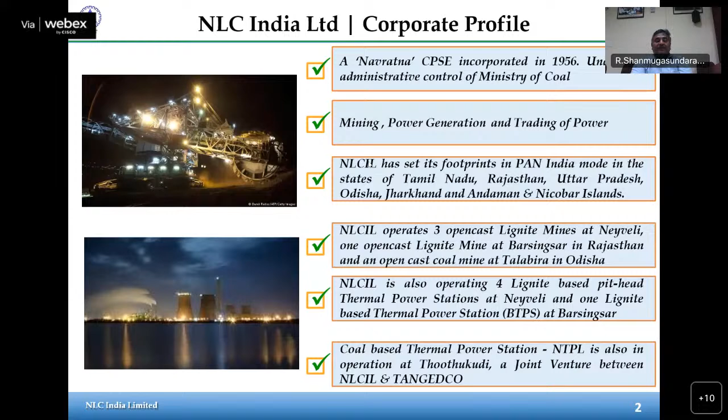NLC is also operating 4 lignite-based pithead power stations at Neyveli and 1 lignite-based power station at Barsingsar, Rajasthan. A coal-based power station at NTPL is also operating at Thoothukudi, a joint venture between NLCIL and Tamil Nadu Generation and Distribution Company. NLC has also forayed into the renewable energy sector.

Presently, the company is operating solar power plants in various districts of Tamil Nadu and the Andaman and Nicobar Islands. NLC is the first CPSE to cross 1 gigawatt capacity of solar power generation. Now the company has become a member of the International Solar Alliance. NLC is aiming to achieve a total renewable energy capacity of 4,531 megawatts.

NLC, in joint venture with Uttar Pradesh Rajya Vidyut Utpadan Nigam Limited, is setting up a 3 x 660 MW coal-based thermal power station at Ghatampur, Uttar Pradesh. NLC is entering into coal mine projects also and has commenced coal production in Talabira, Odisha. So this is our pan-India presence.

At Neyveli, we have lignite mines and power stations, and in Rajasthan we have mines and a thermal power station. At Ghatampur, we are now constructing a coal-based power plant. At Talabira, we have coal mines, and in the Andaman Nicobar Islands we have our renewable solar power plant. In Tirunelveli district, wind and solar energy is there, and across Tamil Nadu we have more renewable energy with wind and solar power generation.

So this is our core business, mining. Currently, we have a mining capacity of 50.6 million tons per annum, out of which 20 million tons is from coal and the rest is from lignite. In power generation, our thermal power station capacity is 3,440 megawatts, and from renewable sources it is 1,370 megawatts of solar energy and 51 megawatts of wind energy.

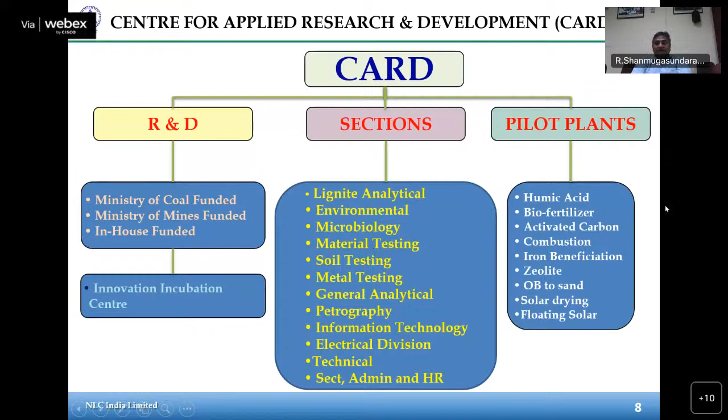We have different sections, and we are an NABL accredited laboratory: lignite analytical, environmental, microbiology, material testing, soil testing, metal testing, general analytical, and petrography. They analyze the regular samples, and we also have pilot plants like humic acid, biofertilizer, activated carbon, etc.

Currently there are around 900 billion tons of coal, and low rank and high-ash coal is more than 50% in the entire world. So we have to depend on coal for our energy.

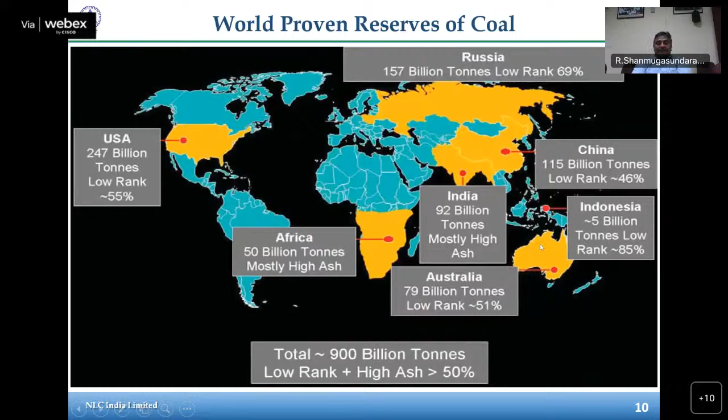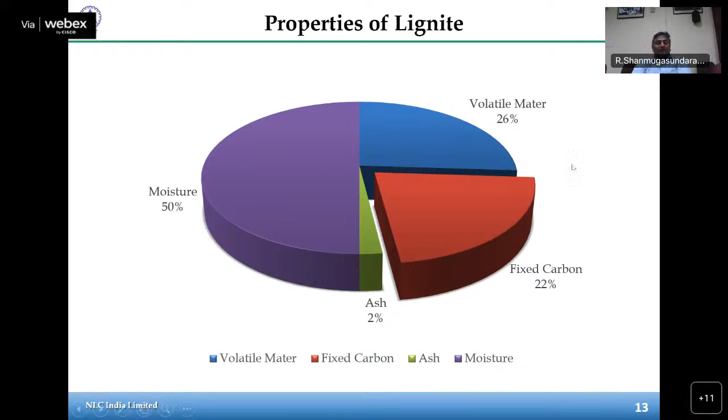So this is our property. As you are aware, our lignite contains more moisture, that is more than 50%; 50 to 56% moisture is there. Volatile matter is 26%, fixed carbon is 22%, and ash is around 2%.

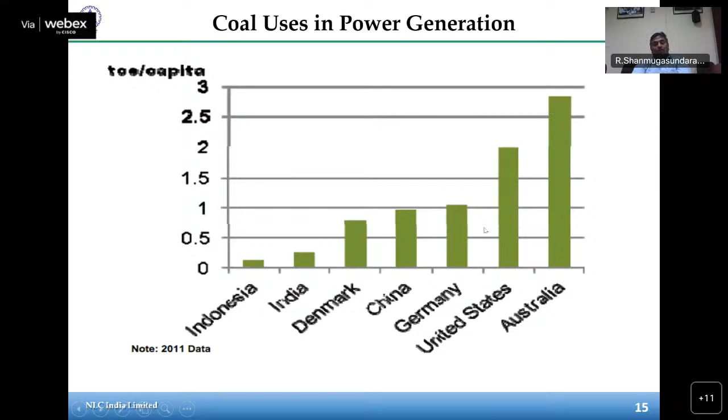So this is the coal use in power generation, in tons of oil equivalent per capita. India is around 0.3 tons of per capita coal use. Compared to developed countries like Australia, it is more than 2.7, and the United States and Germany are all above one ton of oil equivalent.

So, need for reduction. The United Nations Environment Programme estimated that for the world to prevent global warming from reaching more than 1.5 degrees centigrade, the world would need to cut carbon emissions by roughly 7.6% annually for the next decades. To achieve this goal set in the 2015 Paris Climate Agreement, a combination of carbon capture strategies is required in addition to the transition to low carbon energies.

Additionally, the global demand for energy has been forecasted to increase by 50% in 2030, with oil and gas the major feedstock for 90% of chemicals, petrochemical products, and energy. Hence, carbon capture, also known as sequestration, is an effective strategy to scavenge carbon dioxide from the atmosphere, decarbonize industries, and promote clean fossil energy production. It has become an effective approach to mitigate global warming and dangerous climate change. Furthermore, it has become a sustainable energy technology that could be used for long-term storage.

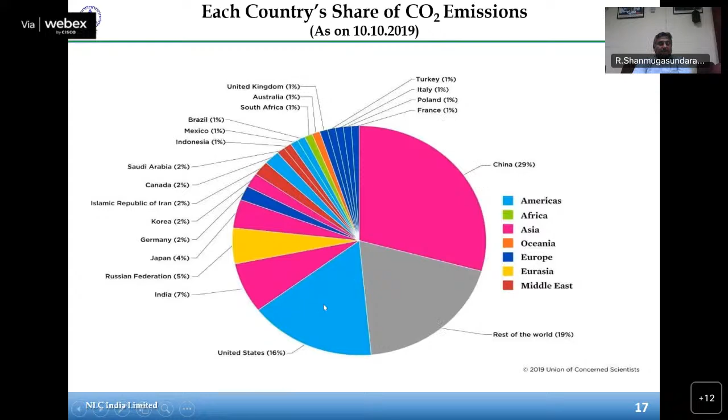This is each country's CO2 emission. You see, China is emitting around 29%, USA is 16%, whereas our India, we are emitting only 7% of the CO2.

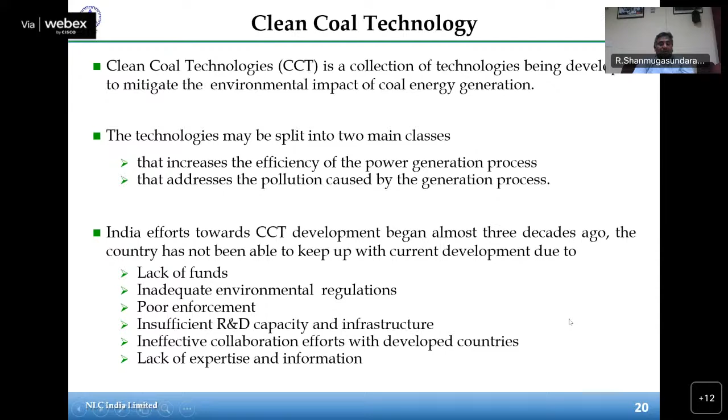In India, efforts towards clean coal technology development began almost 3 decades ago. The country has not been able to keep up with current developments due to lack of funds. We have to put more FGDs, that is flue gas desulfurization, which requires more funds and is an additional burden for thermal power plants, and inadequate environmental regulations. Still we don't have any CO2 emission norms. Also poor enforcement, insufficient R&D capacity and infrastructure, ineffective collaboration with developed countries, and lack of expertise and information.

So clean coal technologies: during mining, through management and practice, we can reduce some extraneous materials in coal preparation. In coal, we can use washing and beneficiation, thereby reducing ash and sulfur contents.

Conversion technologies: currently most of the power plants are operated at subcritical level. We can go for supercritical and pulverized fuel bed combustion and integrated gasification combined cycle. Post-combustion cleaning also we can do, with particulate and gaseous pollutant removal. Burning coal gives rise to a variety of wastes which must be controlled or at least accounted for.

So-called clean coal technologies are a variety of evolving responses to late 20th century environmental concerns, including global warming. However, many of the elements have been applied for many years; coal cleaning by washing has been standard practice in developed countries for some time. It reduces emissions of ash and SO2.

Electrostatic precipitators are used in our thermal power plants, and thereby we collect more than 99% of the fly ash. All the fly ash is used effectively by cement companies and brick making companies. So we are utilizing 100% of the fly ash, and bottom ash is also used for road construction, road laying, and embankments.

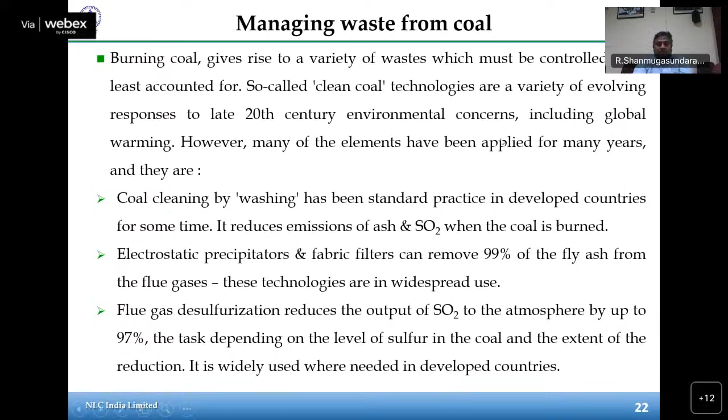So low NOx burners allow coal-fired stations to reduce nitrogen oxide emissions up to 40%. Coupled with reburning techniques, NOx can be reduced by 70%. Increased efficiency of plant, up to 46% thermal efficiency, around 50% expected in future, means that newer plants create less emissions per kilowatt hour than older ones. Advanced technologies such as integrated gasification combined cycle also give more than 50%.

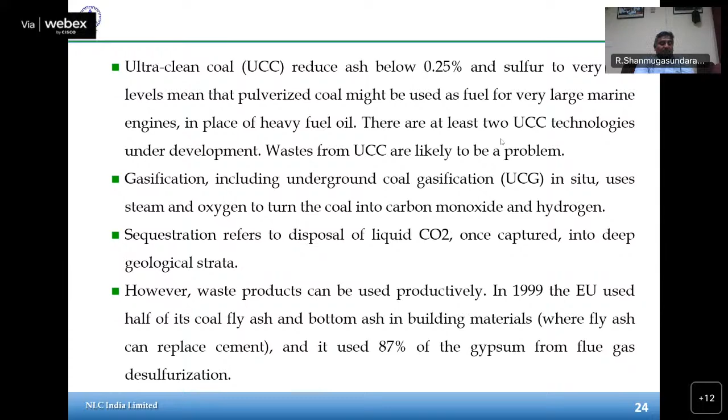Ultra clean coal reduces ash below 0.25% and sulfur to very low levels, meaning that pulverized coal might be used as a fuel for very large marine engines in place of heavy fuel oil. There are at least two UCC technologies under development. Gasification, including underground coal gasification in situ, uses steam. Sequestration refers to disposal of liquid. However, waste products can be used productively. In 1999, the European Union used half of its coal fly ash and bottom ash in building materials.

So, fluidized bed combustion: here limestone and dolomite are added during the combustion process to mitigate SO2 formation. Flue gas desulfurization, also called scrubbers, removes large quantities of sulfur and other impurities. Low NOx burners and integrated coal gasification are already discussed. Selective catalytic reduction achieves NOx reductions of 80 to 90% or more, and it is deployed on approximately 30% of US coal plants. Electrostatic precipitators are always used in our thermal power plants to remove fly ash and other dust particles. Efficiency improvements raise plant efficiency and reduce carbon dioxide and other emissions.

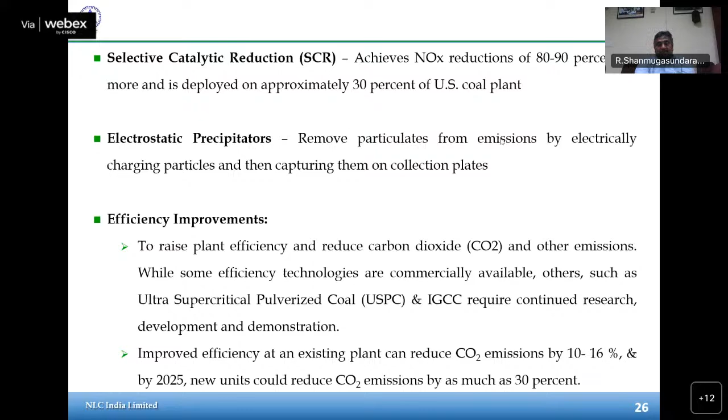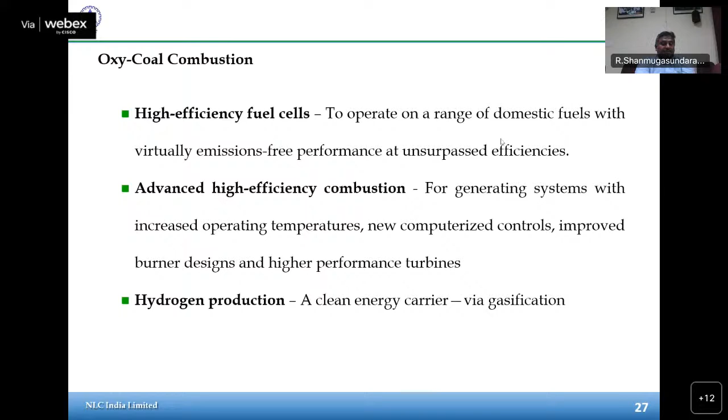While some efficiency technologies are commercially available, others such as ultra supercritical pulverized coal require continued research, development and demonstration. Improved efficiency at existing plants can reduce CO2 emissions by 10 to 16%, and by 2025 new units could reduce CO2 emissions by as much as 30%. Oxy-coal combustion; high-efficiency fuel cells to operate on a range of domestic fuels with virtually emissions-free performance at unsurpassed efficiencies. Advanced high-efficiency combustion for generating systems with increased operating temperatures, new computerized controls, improved burner designs, and higher performance turbines. Hydrogen production, a cleaner energy carrier, via gasification.

So carbon dioxide capture and storage. Here post-combustion capture from flue gas using amine solvent and chilled ammonia can be tried. And pre-combustion capture using IGCC to isolate and capture CO2 before it is released. Oxy-fuel combustion using pure oxygen in the boiler to significantly reduce the dilution of CO2 in the exhaust gas system. These are the carbon sequestration options.

The CO2 produced by power stations can be used in terrestrial sequestration, that means by growing more trees that can absorb CO2, and we can store it in the ocean, and also enhanced oil recovery. So we can inject that CO2 into depleted oil wells so that we can improve the recovery of oil also.

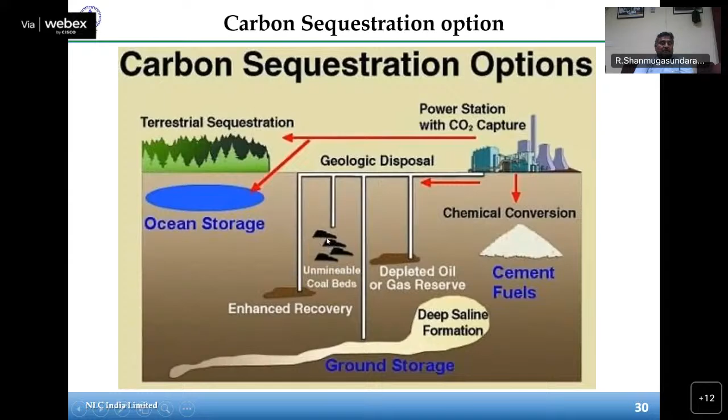So flue gas separation and oxy-fuel combustion. Separation of CO2 from flue gas: CO2 can be separated from the flue gas mixture through solvent absorption, physical adsorption, membrane separation, and cryogenic distillation. In the current scenario, CO2 is captured from flue gas through liquid absorption with solvents such as Selexol, Rectisol, and monoethanolamine.

So we are planning to have this CO2 sequestration at our Barsingsar power plant at one unit with BHEL. They have given some proposal, so we are working on it. So we are going to capture at the 125 megawatt plant at Barsingsar, Rajasthan, combined with hydrogen also, from that CO2 and hydrogen.

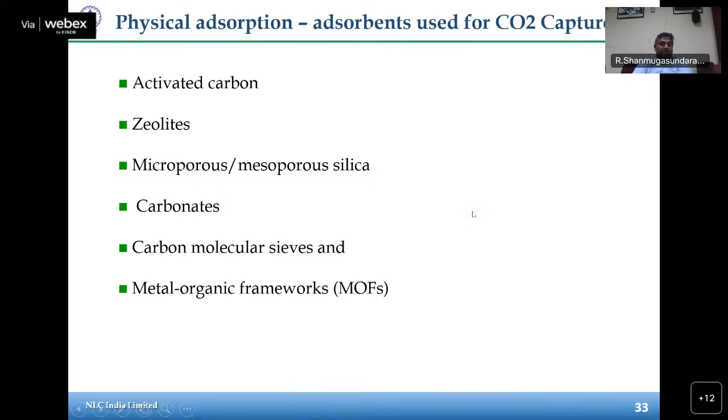So these are the physical adsorption materials used for CO2 capture: activated carbon, zeolites, microporous and mesoporous silica, carbonates, carbon molecular sieves, and metal organic frameworks. Algae also can be used, green and blue-green algae. They need carbon dioxide for photosynthesis, so that will produce more biomass, and from that we can produce bio oil and other things. These are the algal captures.

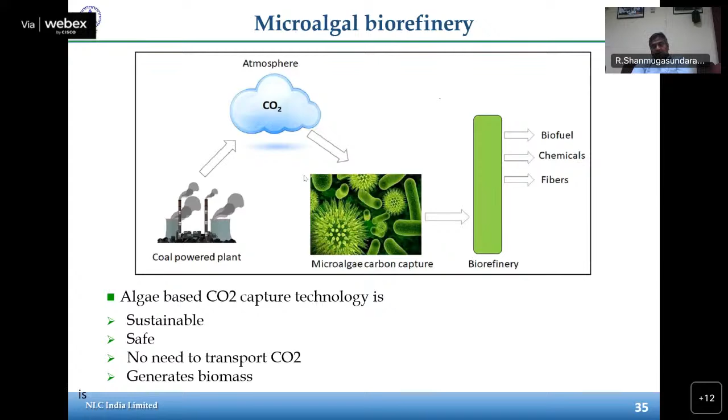This is sustainable, safe, and there is no need to transport CO2. It generates biomass, so we can produce biofuel, chemicals, and fibers. So this is microalgal sequestration. We have done it at our thermal power plant, Thermal One expansion, with NIT Trichy and Pondicherry University. We trapped the flue gas from a chimney, standardized it, stabilized it with some treatments, and fed that carbon dioxide to the algal photobioreactor. Thereby we get more biomass, and we utilized that for producing biodiesel. That project we have completed.

So this is another project. We have done upgradation of brown coal with Kobe Steel, Japan. Our coal has more than 50% moisture, and their technology removes all moisture, so there is 0% moisture. Normally our lignite has a calorific value of 2200 to 2300, whereas after UBC, that is upgradation of brown coal technology.

We can increase calorific value to more than 5000 kilocalories. This can be very well used in ultra supercritical boilers.

With funding from METI, the Ministry of Economy, Trade and Industry of Japan, and also Kobe Steel Japan, we have done this project during 2012. We have provided lignite to their plant in Indonesia. They prepared and we studied the product, but techno-economically it is not very viable.

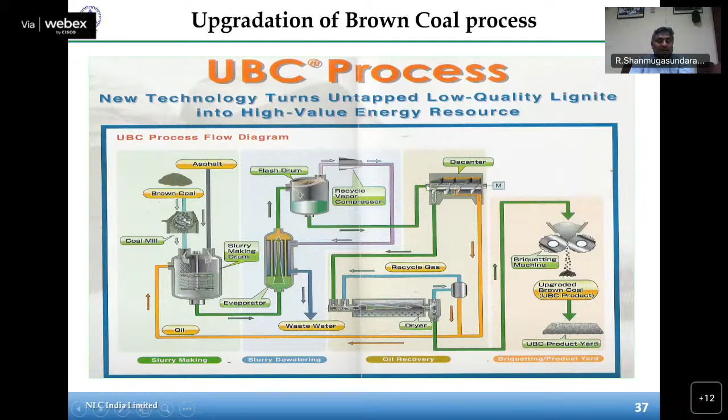This is upgradation of brown coal. Here lignite is mixed with asphalt and kerosene oil. After this evaporator, the oil is separated, and during the separation, wastewater also comes out. During the flash drum process, we can get dried lignite, which can be used in ultra supercritical boilers.

At present, India's lignite deposits within 150-meter depth at a ratio of 1 to 15 are being mined. Though the total geological reserves of lignite in the country are estimated at 44,000 million tons, the reserves within 150 meter depth amenable to open cast mining are only 8,800 million tons, which is only 20% of the reserve. The balance 80% of the reserves are available at greater than 150-meter depth.

There are problems of mining such as slope failure due to unconsolidated nature of overburden, presence of aquifers requiring large quantity of groundwater pumping, high stripping ratio, environmental problems, huge quantity of overburden handling, mine closure, and post-mine closure management.

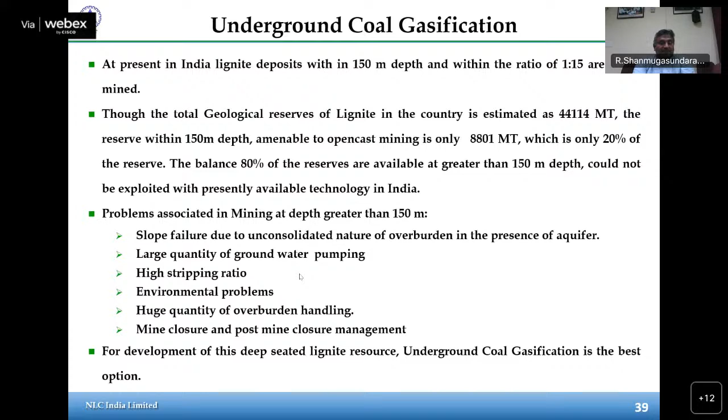For development of this deep-seated lignite resource, underground coal gasification is the best option. This involves underground in-situ conversion of unworkable, deep-seated, thin seam, steep dipping coal or lignite into combustible production gas.

Underground coal gasification operation is initiated by drilling two adjacent boreholes into the coal seam and injecting pressurized agents like hot air, oxygen, or steam into the coal seam, igniting the coal seam and recovering the combustion gases through the adjacent borehole. The connectivity between the injection and producer wells is made by special linking techniques. This is the UCG process.

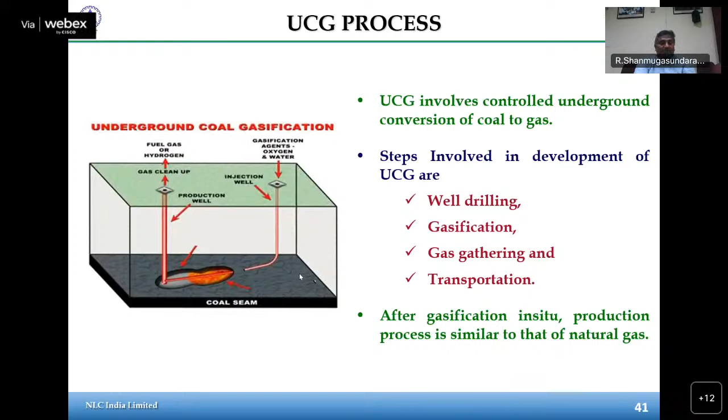The process involves first well drilling, then gasification, gas gathering, and transportation. Two boreholes are used: the coal is ignited and combustion maintained by injecting air or oxygen and steam, and the resulting gases are brought to the surface by the secondary borehole.

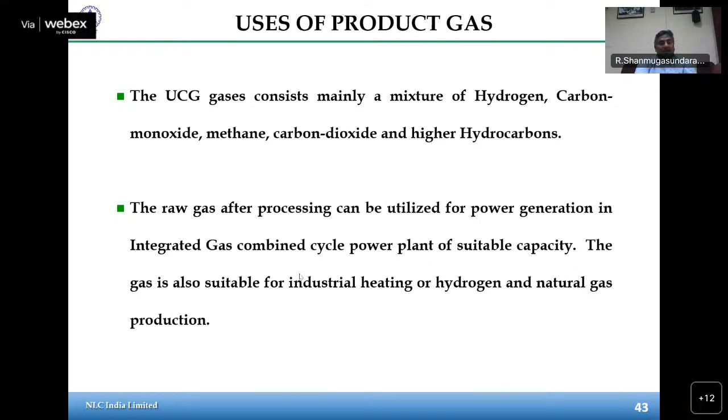As for uses of the product, UCG gases consist mainly of a mixture of hydrogen, carbon monoxide, methane, carbon dioxide, and higher hydrocarbons. The gas after processing can be utilized for power generation in an integrated gas combined power plant of suitable capacity. Advantages of underground coal gasification include less dust, noise, and visual impact, lower water consumption, and low risk of water contamination.

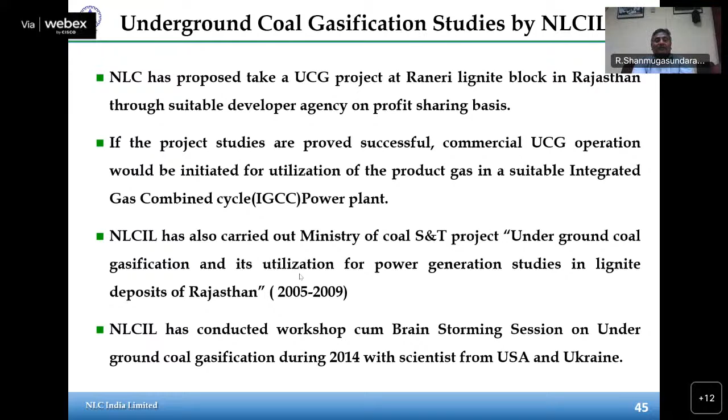This gas is then cleaned by a gas cleanup process. After cleaning, the coal gas is used in the combustion turbine to produce electricity. Combined cycle means this design consists of a combination of turbine and generator, a heat recovery steam generator, and a steam turbine generator. The exhaust heat from the combustion turbine is recovered in the heat recovery steam generator to produce steam, which then passes through the steam turbine to power another generator, producing more electricity.

This is why we use integrated gasification combined cycle. It needs no explanation that gas-based power plants are more efficient than pulverized coal. Implementation of this project will reduce the use of scarce and expensive coke in metallurgy and other industries. Mixing of higher grade coal is totally eliminated, so only local coal and high ash coal can be used, significantly improving the environment by reducing harmful dust and gas, and creating high performance.

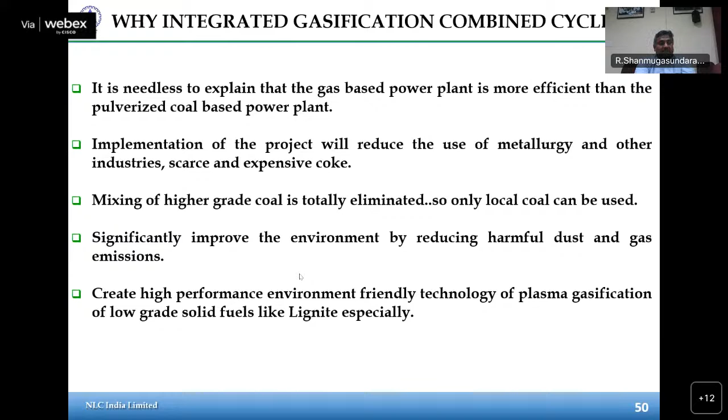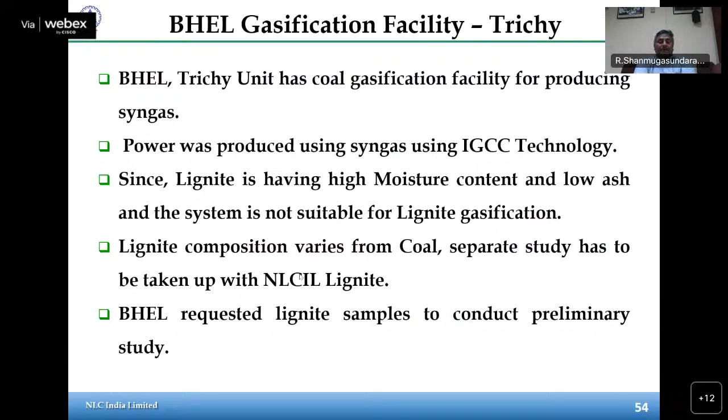On gasification technology, we are currently working with BHEL to produce this, and we have visited the Trichy and Hyderabad units. We gave our samples, and they tested and provided the syngas composition. Based on this, we have signed an MOU with BHEL to conduct a feasibility study for setting up a pilot plant for lignite-to-syngas conversion, integrated with clean coal power generation by IGCC. We are also working on lignite-to-methanol and lignite-to-diesel for clean coal energy, and that tendering is underway, sir.

Fossil fuel based power plants are the major source of carbon dioxide emissions, which leads to global warming. The physical and chemical methods followed to mitigate CO2 emissions are not economically viable, so conversion of captured CO2 into a valuable product is the need of the hour. More research is warranted in this direction to mitigate global warming. Sustainable power development calls for adoption of clean coal technologies to be explored to mitigate global warming.

Thank you very much for the opportunity given, sir.

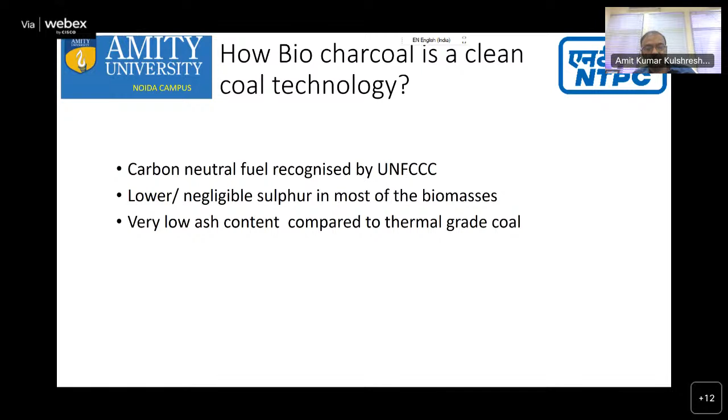So what are the advantages compared to other renewables like solar, wind, and biomass power generation? It has several other advantages, like improving air quality by discouraging open burning of biomass, and utilization of already existing thermal power infrastructure with minor changes.

Creation of solar or wind capacity requires establishment of new plants, but here only the change of fuel is done, and your so-called dirty power resources are converted into clean fuel power plants. So elimination of waste while producing power is another advantage. While you are producing power, you are also clearing the waste.

It also discourages primitive use of biomass for cooking, improving the health of users. When biomass like firewood is used for cooking or heating, it creates a lot of smoke. By providing this alternate market, we discourage this primitive use, and the smoke causing health hazards is eliminated.

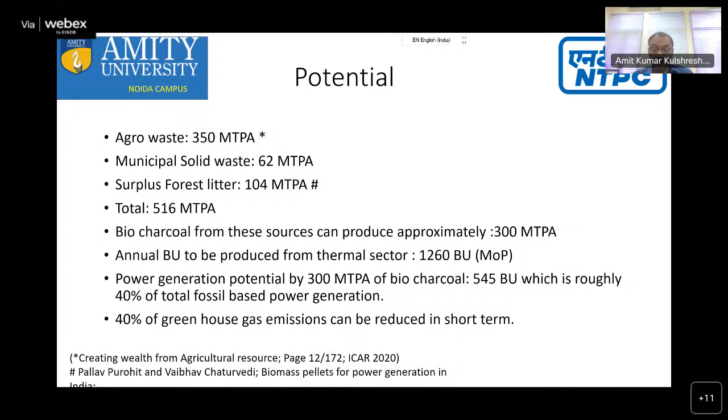So if we go with this kind of torrefaction process. This was about the potential which I wanted to discuss in the beginning, but somehow I skipped that slide. So also, what is the NTPC experience? I have already shared this. We were the pioneer of biomass co-firing, where under my leadership we did the test firing at NTPC Dadri, and then we started the procurement process for the rest of our plants and fired about 70,000 tons of biomass.

Right now we are installing a torrefaction plant at Varanasi. The Varanasi plant is a big commercial scale plant where 600 tons per day of biomass, mostly municipal solid waste biomass, will be torrefied, which is the most difficult kind of biomass for torrefaction. The agro waste and the forest waste are easier to torrefy. So we are experimenting with this municipal solid waste in the NTPC Varanasi plant. For that, we installed a pilot plant at NTPC Dadri a few years back. After the successful operation of that, now we are installing a big commercial scale plant at Varanasi.

The first unit is expected within a few days, maybe by 15th of August this year, and we are planning to install a few pelletization plants also, where the torrefaction process will not be used, only simple pelletization of the agro waste will be done in Punjab. So a few plants there also we are in the process to install. Let us see when they see the light of the day.

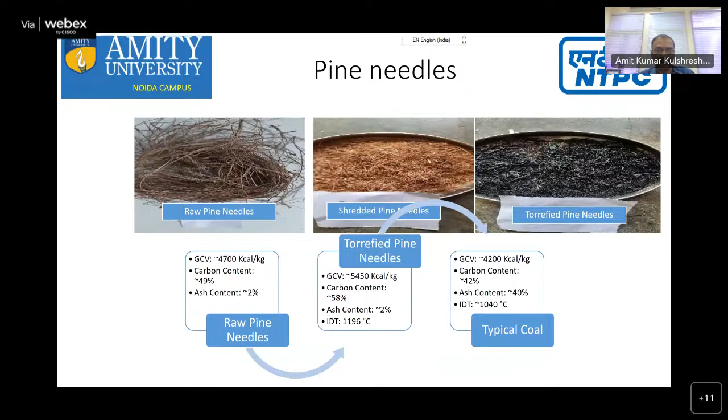So in conclusion, we can say that biocharcoal is a promising clean coal technology and has potential to fully or partially replace mineral coal in most applications. In addition to being a renewable fuel, it has several other advantages like low waste generation, lower emissions, improvement of air quality, and creating more rural wealth.

NTPC has shown the way, and now it is the time to scale up biocharcoal utilization. I would request CIMFR and other CSIR institutes to research in this direction so that biocharcoal utilization is possible at commercial scale. Amity University Noida is also conducting world-class research in this area. The institutes can collaborate among themselves in this research and contribute to scaling up biocharcoal utilization for energy recovery.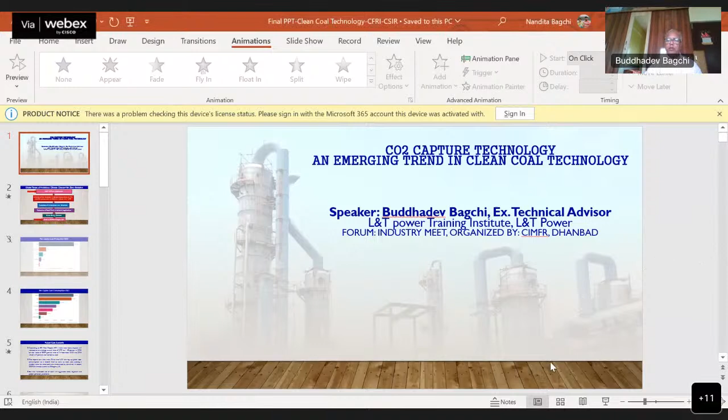Now we are going to my presentation. I am really thankful to the CIMFR authorities, especially the principal scientist, and also Dr. Mukherjee for inviting me and giving this opportunity to speak about clean coal technology. My first speaker almost covered, I will say, 60% of my subject, the CO2 capture technology. So I will add something on the topics.

Now this is the picture of global climate change and net zero emissions. At the Conference of Parties, the Paris Conference, the main agreement was limiting the increase of global temperature to 2 degrees centigrade, with our effort being 1.5 degrees centigrade. To achieve this target, our first action will be reduction of greenhouse gas emissions, and to reduce this, the next target should be reduction of fossil fuel, including coal, in industrial applications.

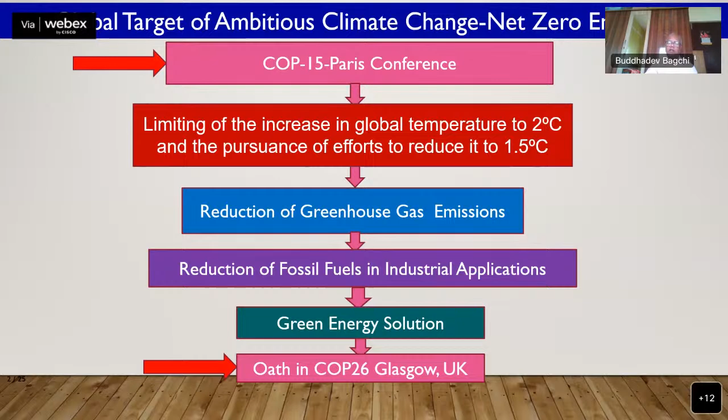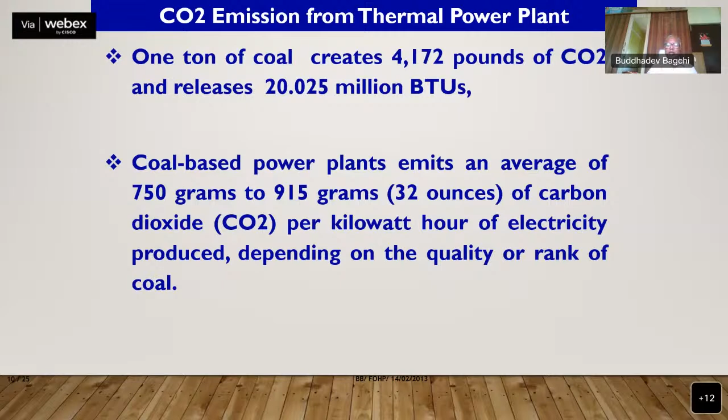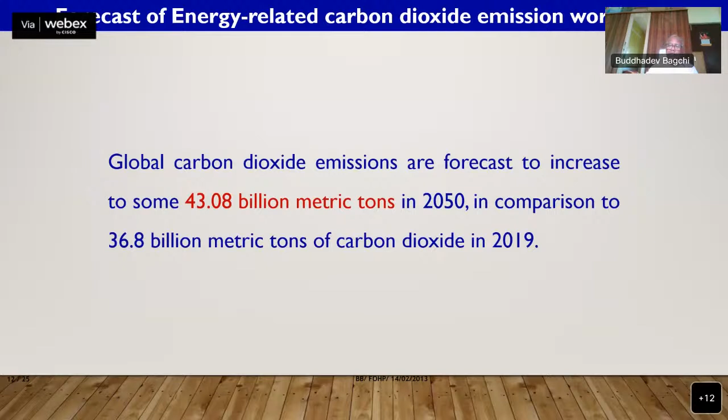So in this respect, the only solution is CO2 capture, utilization and storage technology, CCUS. It is an emerging trend and innovation of clean coal technology. Now, CO2 capture, utilization and storage technology is already running in different countries, somewhere commercially, somewhere as pilot projects. Okay.

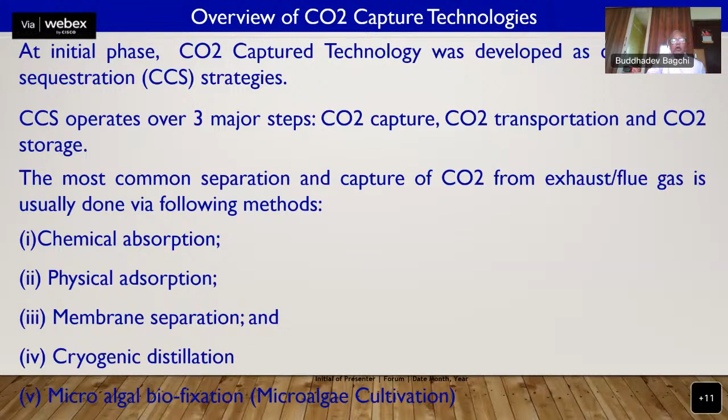The most common CO2 capture technologies usually use the following methods: chemical absorption, as already told, physical adsorption, membrane separation, cryogenic distillation, and also microalgae biofixation. These are the 5 common CO2 capture technologies being used globally at present.

Now, apart from this, there is various R&D work on CO2 capture technology. The advanced R&D work: monoethanol amine, MEA, an alternative absorbent to conventional amine. With conventional amine we generally use alkanol amine, but here we are using monoethanol amine to increase the CO2 absorption capacity. Then another is the combination of DMCA and DPA. It also increases the absorption capacity of CO2.

Next, the hydrate method: formation and dissociation of hydrate. The latest research work. Another research work has also been done using an aqueous solution of potassium carbonate as an absorbent. Next, R&D work has also been done on the calcium looping process using calcium oxide as a solvent for capturing CO2 from flue gas.

And another that has been implemented as a pilot project is the Alstom chilled ammonia process. In the ammonia process, ammonia will be changed into ammonium carbonate or ammonium bicarbonate. And here the energy required for this process will be lesser, and absorption capacity will be very high, about 90% CO2 absorption. Another research was the aqueous solution of potassium hydroxide. So this is the R&D already done on CO2 capture technology.

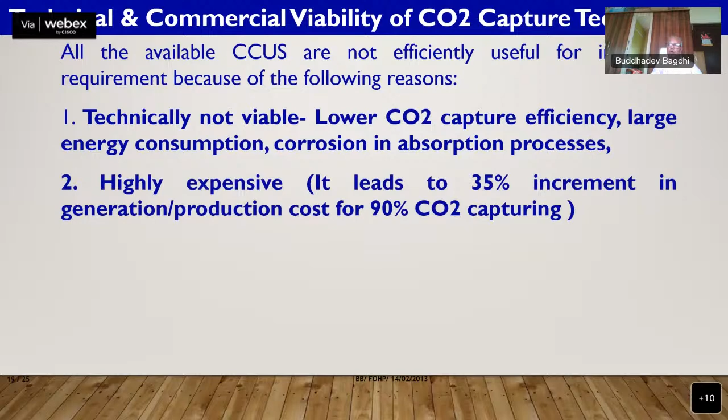But the available CCUS are not efficiently useful for industrial requirements because of the following reasons. Commercial and pilot projects are running, but they have some drawbacks. Technically not viable: lower CO2 capture efficiency, large energy consumption, corrosion in the absorption process. That is the first, technical disadvantage. Highly expensive: for example, it leads to a 35% increment in generation or production cost for 90% CO2 capture. Can you imagine how much it will affect the commercial area? It is not viable at all.

The second part after CO2 capture: it is transported and stored in a geological store or the ocean. It needs a huge pipeline, and storage is not an easy task. It is commercially very costly and technically not so viable. And third is leakage. There may be a chance of leakage from the CO2 storage, which may create further environmental pollution.

And one is microalgae cultivation. It is definitely a very efficient way of CO2 capture, but it is highly expensive, especially the microalgae cultivation process. But the capture is very efficient. So these are the disadvantages of commercially available or pilot CO2 capture technology projects.

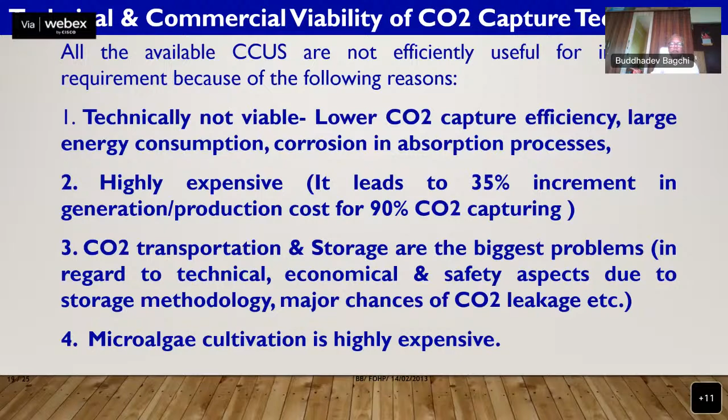Now, ongoing R&D work is going on in some areas to make the technology more efficient and commercially and economically viable. These are the projects underway. A nanoporous material called metal organic framework, MOF. It is spongy, porous, with a high internal surface area, and its CO2 capture capacity is very high. Cornell University has invented a material, nanosponges, very micro sponge materials, that could also improve carbon capture economics.

The third material is a combination of MOF and a polymer. It captures about 90% of CO2 from power plant flue gas. And another is a copper silicate crystal from the Korean Sogang University, named SGU, that can also capture CO2 much more efficiently. Research is still going on.

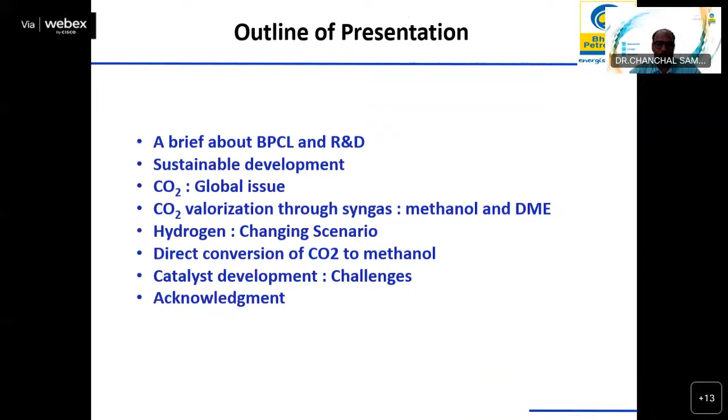Before going into detailed presentation, let me allow to speak about our company, who we are, and what we do.

BPCL is the second largest state-owned company. We are the third largest refiner in India, having 14% Indian refining capacity. It's also the seventh largest company by turnover. We own 3 refineries, more than 19,000 retail outlets, 54 LPG bottling plants. We operate across the length and breadth of the country, and we deliver LPG even in the remote parts of the country, and we are really proud of that. Energizing lives is our motto, and we promise to deliver pure for sure in every activity.

BPCL R&D Center is located in Greater Noida, near Delhi. It is in Uttar Pradesh, and it was established in 2001. We have a vibrant team of scientists and engineers from reputed national and international institutes. And we also do a lot of collaboration with various national and international institutes to accelerate our R&D program.

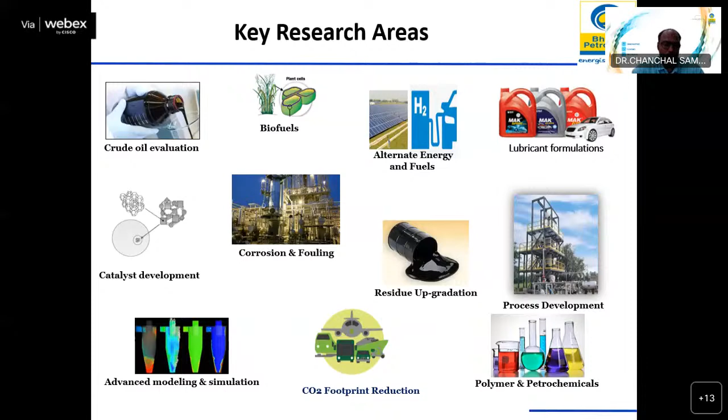So we are all talking about sustainable development, and it is the only way forward because we have emitted enough CO2. And the global CO2 concentration has reached an unprecedented level above 400 ppm. So unless we look for circular economy, we will not be able to sustain in the longer term.

Since the conference is all about clean coal technology, and BPCL R&D also has done a lot of research on clean coal technology, especially coal gasification and coal syngas valorization to liquid fuels through the FT route, we bank on our experience and have further extended our research activities through both in-house research and through collaboration for converting syngas to other valuable chemicals, methanol, dimethyl ether.

We need to remember that India is still highly dependent on coal. Although the government has taken a giant step to decarbonize our power sector and set an ambitious goal of 500 gigawatts of renewable electricity by 2030, our dependency on coal will last for quite some time because we have experienced during this summer that even the redundant coal power plants, the government is telling to generate power. Unless the renewable power generation is backed by power backup facilities, coal is going to last for quite some time.

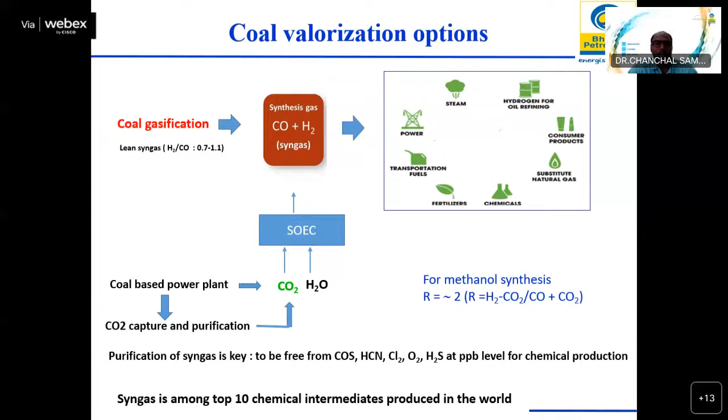So if we look into the research trend on CO2 valorization, the majority of research focus is in the area of CO2, methanol, and CO.

Major global companies in the world are also looking for 7 different kinds of CO2 utilization options, like methanation of CO2 for production of synthetic natural gas, reverse water gas shift reaction for converting CO2 to syngas, and dry reforming of methane. This is also one of the important areas the world is looking at to tackle both CO2 and methane emissions. And then after getting syngas, conversion to methanol, and then methanol to light olefins like ethylene, propylene, CO2 to fuels through methanol via the MTG process (methanol to gasoline), and other cyclic carbonates.

If you look into the various CO2 valorization options, as per International Energy Agency, fuel is going to have medium-term impact in terms of climate benefit, but it is going to reduce significant amount of CO2 emission into the atmosphere because fuels are used in huge quantity.

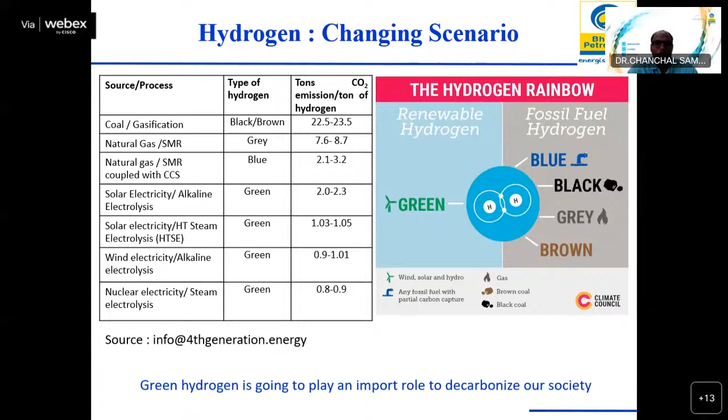If you look into the methanol scenario, just like crude oil, this is also an important commodity which India is highly dependent on import. More than 5,000 crores worth of foreign currency we spend on importing methanol, and this number is gradually increasing.

Niti Aayog is also pushing the M15 program, just like the successful E20 program, for methanol blending in gasoline. So this number will significantly increase, and unless we produce methanol domestically, we have to import huge amounts of methanol from other countries.

That's why CO2 utilization to methanol is a very important step, I feel. Indian government, Niti Aayog particularly, is pushing this project, and Coal India is also taking this project very seriously.

Methanol production process has inherent challenges. This is an exothermic, equilibrium-limited reaction, so the per-pass conversion for syngas to methanol is limited to 15 to 20%.

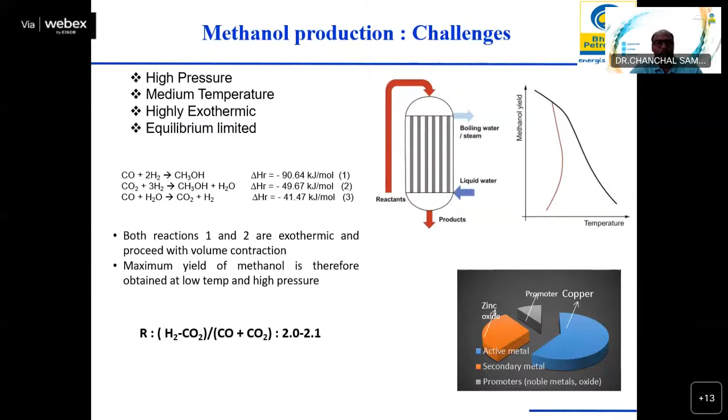So coal gasification also needs to be coupled with a water gas shift reactor to enrich hydrogen, so that we can get the stoichiometric amount of hydrogen by CO ratio of 2.

Methanol synthesis directly from CO2 is much more challenging than syngas to methanol. If we look at the methanol yield with respect to the feedstock CO and CO2, we can clearly find that CO2-based feedstock, or CO2-only methanol production, has much lower conversion and yield compared to syngas.

This technology is also not readily available. The big licensors are Johnson Matthey, Haldor Topsoe, Lurgi, and commercial plants are actually really big in size, 5,000 to 7,000 tons per day capacity, while Indian producers have a maximum capacity of 500 to 700 tons per day. That's why Indian methanol producers are not competitive enough compared to their global peers, and we are importing more than 85 to 90% of methanol.

You can see that we have also — Sir, if you could kindly try to converge and conclude because of passage of time.

BPCL R&D is also working on CO2 to methanol through various internal and external collaborations. FIPI sponsored the CO2 to methanol development project way back in 2014, and BPCL along with IIP Dehradun has done a lot of fundamental research in this area. You can see we have published a number of papers in reputed journals.

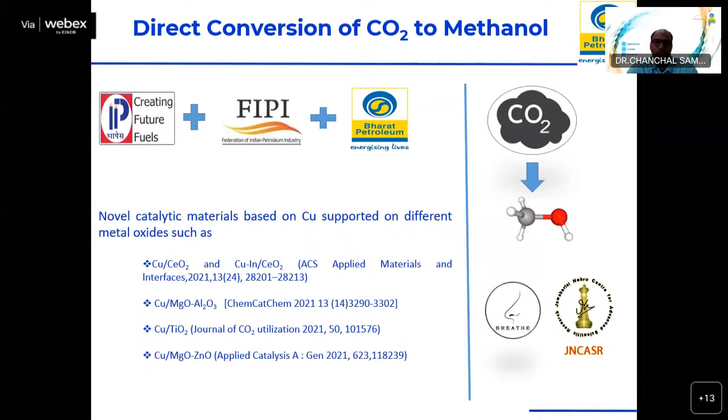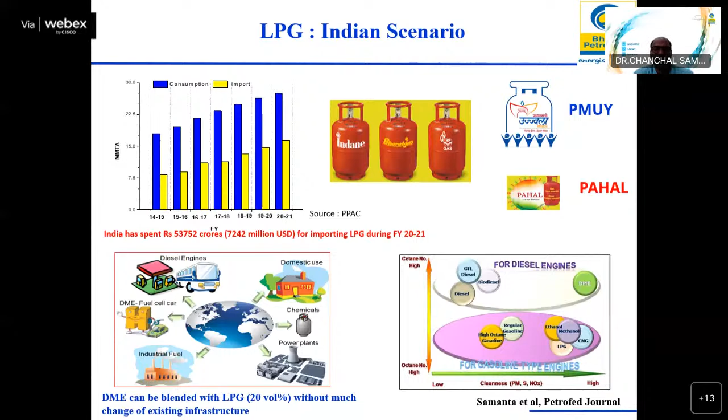Similarly, like methanol, LPG is also being imported in India — more than 50,000 crores India spends on importing LPG. If we can convert CO2 to methanol and then methanol to DME, or CO2 to syngas and then converting to DME, it will benefit India immensely.

You can understand that syngas to DME process has inherently much more benefit in terms of thermodynamics than converting syngas to methanol, and then methanol to DME.

We have also carried out an in-house R&D program through a research fellowship provided by FIPI for development of catalyst and process for direct conversion of syngas to DME. We have filed some of our promising catalyst recipes, and also published our findings in international journals.

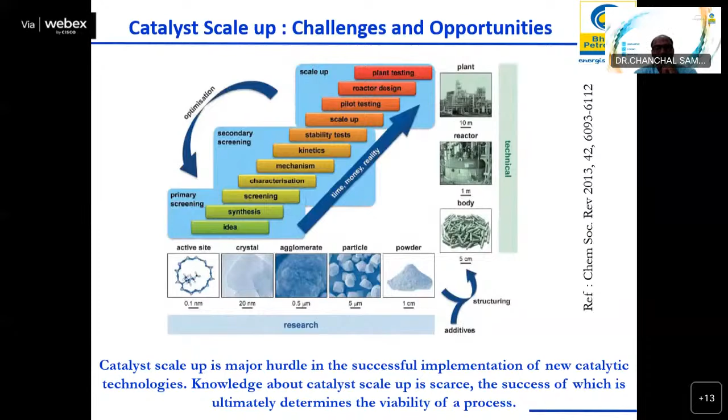In summary, BPCL R&D has experienced and developed significant know-how in coal gasification and converting syngas to chemicals and fuels. We are also pursuing development of energy efficient processes for CO2 capture and further utilization of CO2 to methanol, DME, formic acid, and other valuable chemicals. We have also developed know-how for commercialization of catalysts from lab scale through pilot scale through third-party collaboration. BPCL R&D Center is also open for collaborating with national and international institutes in this CCU area.

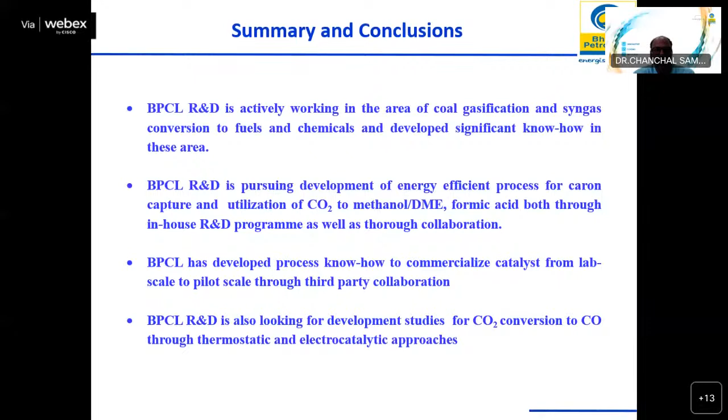Thank you very much. Thank you very much, sir.

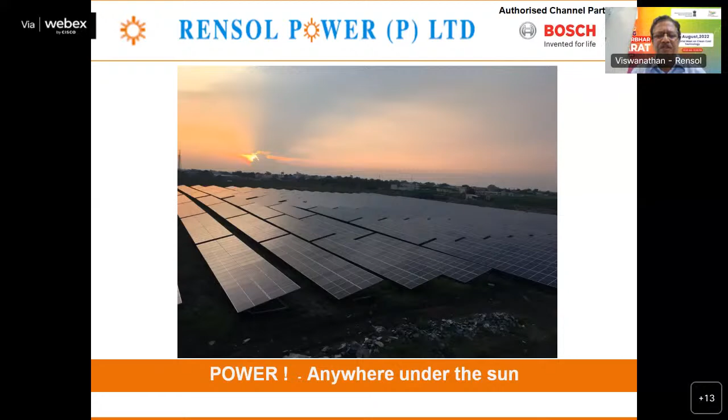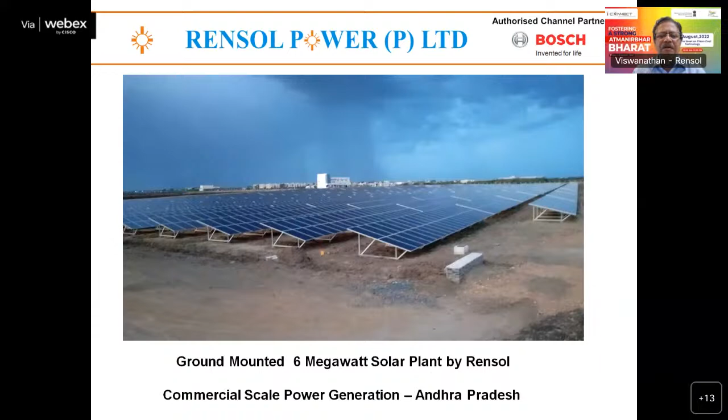We are giving you this background so you understand that we are already exposed to commercial scale power and its issues. That is what we are trying to tell you here. And we are now moving on to the next stage of our continuity in this subject.

We have been looking at hydrogen as a viable alternative for conversion of green energy. Hydrogen as a feedstock has huge potential. It is practically able to become central to the energy domain. It is possible to use it in refining, fertilizer, steel, chemicals, blending with natural gas, transportation, and energy storage.

And as our earlier speaker, Dr.

Chanchal had mentioned, hydrogen is going to be converted to DME, dimethyl ether, which is almost an equivalent substitute, a drop-in substitute for diesel, which is already being pursued very vigorously in Europe. And also it has got the parameters of LPG so that it can be transported more safely. Again, hydrogen can also be made to produce green ammonia, which is going to be another form of energy carriage for hydrogen. So hydrogen has emerged now as the new hope, and it has got multi-industrial usage in establishing energy security. That is the point we wanted to put across here.

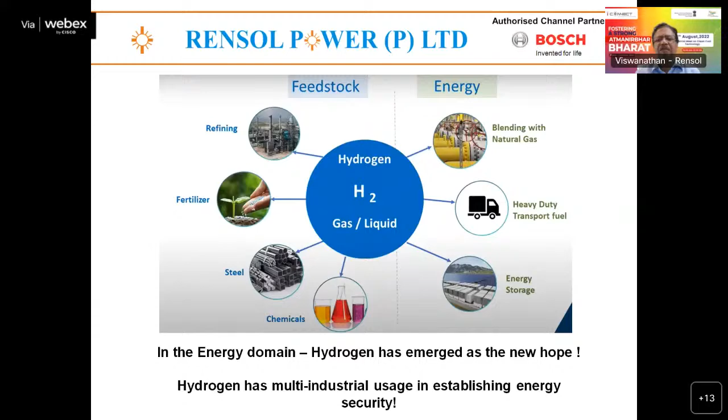As we all know, not all hydrogen are created equal. The hydrogen which comes from coal is probably the most polluting form, and this is called brown hydrogen. And of course, the color codes are almost now familiar to all the scientific community, because it's a topic of daily interest in all forums, both in the business domains as well as in the scientific domains. So Rensol has now set its goals on developing green hydrogen production technology, embracing the concept of Atmanirbhar Bharat, and we are basically a company which innovates in technology areas. So we have moved into the development of green hydrogen prototypes.

Now, as you know, the basics of hydrogen production is electricity and water, which is of course the simplest process, which is electrolysis. And we are relevant here because we already are working with electricity from solar energy on a day-to-day basis in our business on a large scale. And therefore, the other components are also available to us. I will explain how it is happening.

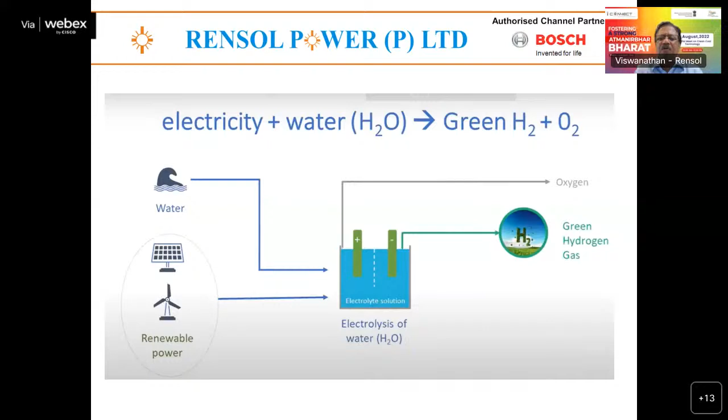And as a progress in our green hydrogen journey, we have made progressive steps in pursuit of green hydrogen development. We have harnessed renewable solar electricity. As you have already seen, we are capable of designing megawatt scale power plants to generate the high power DC and currents which are required in the electrolysis process. And we have already developed the solar powered RO plant for water feedstock for the H2 generation.

And now we have also developed an indigenous Indian electrolyzer prototype unit, which is in a mature state of development for establishing distributed H2 generation, because as we have seen, on-site H2 generation is probably the need of the hour, at least in the initial stage, wherein we are able to establish the fact that green hydrogen is a reality, and then we can move on to large scale centralized generation, where we can think of conversion into ammonia or DME or methanol or similar byproducts. So thus we are in the pursuit of green hydrogen goals for energy security for the future.

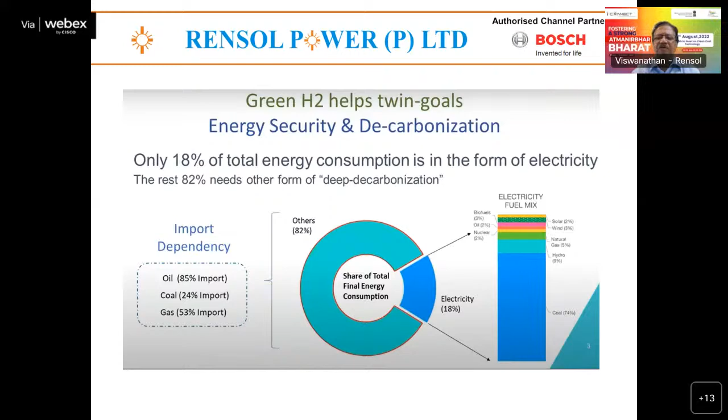On the side of technology collaboration, we have invested in technical capabilities to design and develop an indigenous solar-powered water treatment plant and robust, solar-compatible electrolyzers for making green H2.

Rensol is already into technology collaboration with institutions like IIT Madras and ARCI. We are working with them on solar-based solutions for hydrogen. We also have an MOU with Fraunhofer of Germany in solar thermal storage. Rensol is also currently working with one of the senior scientists at CIMFR for development of gas separator membranes.

That is the channel through which we became an industrial associate of CIMFR, and we are in this forum today. We thank you for the opportunities. We now look forward to working in partnership with the end users of hydrogen for carrying out field trials in on-site green H2 generation in the near future. Those trials would establish the possibility of going to scale later on.

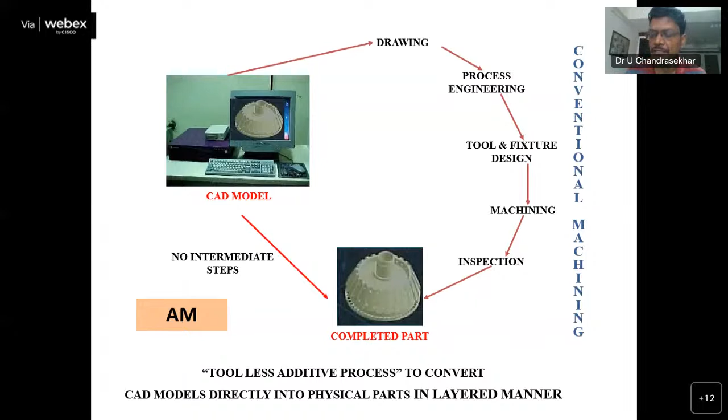In additive manufacturing, in a toolless manner, whatever the complexity of the part, we can translate the digital design or CAD model into a physical replica in one single step, which has significant impact on the preparation time as well as the ease of manufacturing. Having said this, additive manufacturing technology comes to the forefront in various formats.

The most commonly seen additive manufacturing machine is the FDM printer, seen on many tables, wherein filaments are extruded at high temperature so that they turn viscous, liquefy and are deposited on a build platform. With this technology you can make parts out of thermoplastics like ABS, PLA, polyetherimide, polyether ether ketone, etc.

Other equally well-known technologies are stereolithography, through which you can make photopolymer resin parts, laser powder bed fusion, through which you can make metallic parts, and directed energy deposition, wherein you can selectively deposit a wide repertoire of metallic materials on the points of interest.

With this availability of technologies and materials, if you take a quick glance at how this technology has been used in the aeronautical sector, to start with it was just a prototyping tool for making components of a gas turbine engine. Then came a phase wherein, using airworthy plastics, whole aircraft interiors were manufactured using additive manufacturing.

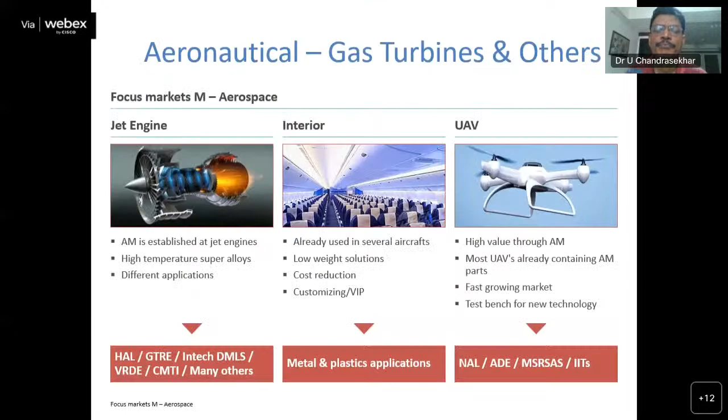In the year 2022, as we are speaking, we are talking about whole systems, such as ornithopters and quadcopters, being made through additive manufacturing and directly put into field use. And I would like to spend some time delineating the influence of this technology on the energy sector.

The conflict between growing energy demands of the nations put together and the problem of global warming is a grand challenge. And to tackle this challenge, we require many scientific and technological innovations. Additive manufacturing as an innovation in the manufacturing practices has created a niche for itself in terms of producing extremely complex parts directly from the CAD designs out of materials like plastics, metallic materials, ceramics, waxes, and composites, with a significant positive imprint on reduction of the energy requirements.

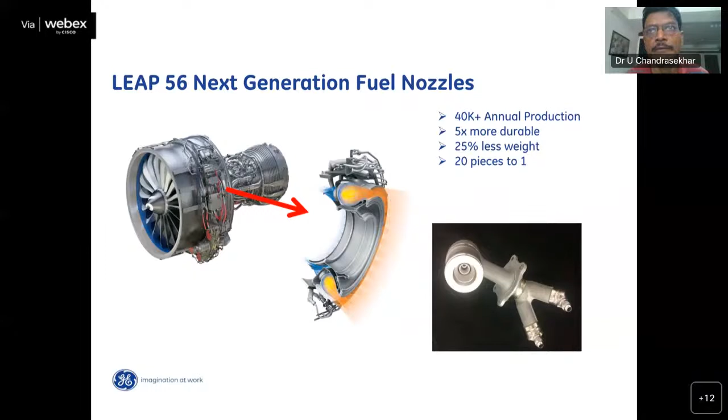GE has been doing pioneering work in this particular field for the past about 15 years. You can see here a part called the fuel nozzle, consisting of nearly 20 pieces that have been transformed into a single part with a phenomenal positive impact on time compression as well as cost reduction. So a component with 20 plus parts has been converted into a monolithic design. And till now, GE has produced more than 150,000 nozzles of this kind for their contemporary LEAP engines. So this is one of the places where the industrialization of additive manufacturing is a very dominant feature.

Here is one more instance wherein Siemens has converted a component with 13 parts, close to 19 weldments, into a single part. It's called the burner, used in the energy plant, and the burner, which is made from high temperature resistant cobalt chromium alloy using laser powder bed fusion, has been put to rigorous testing to ensure its integrity under thermomechanical conditions that simulate the conditions in the energy plant.

So the technology of additive manufacturing has been around for nearly 20 years. In the initial phases, when the material choices were limited, when the technologies were still evolving, there was an innovation trigger. This happened in the late 90s, and there was a peaking of expectations. Immediately after that, there was a trough of disillusionment because the materials were not capable of withstanding the engineering conditions pertaining to the operable conditions. And in course of time, there were tremendous contributions from multiple disciplines, by virtue of which there is a slope of enlightenment leading to the service induction of additive manufacturing.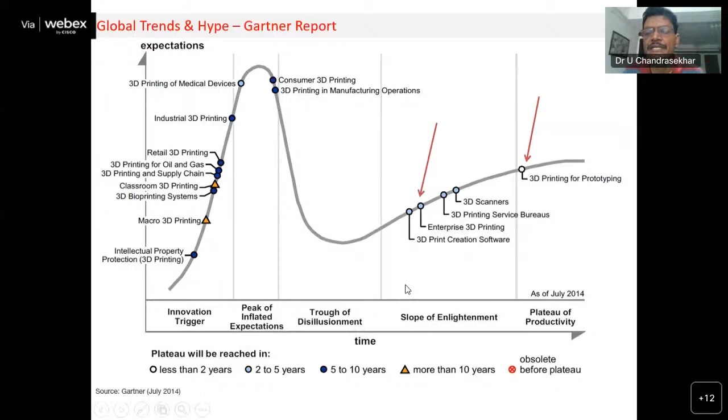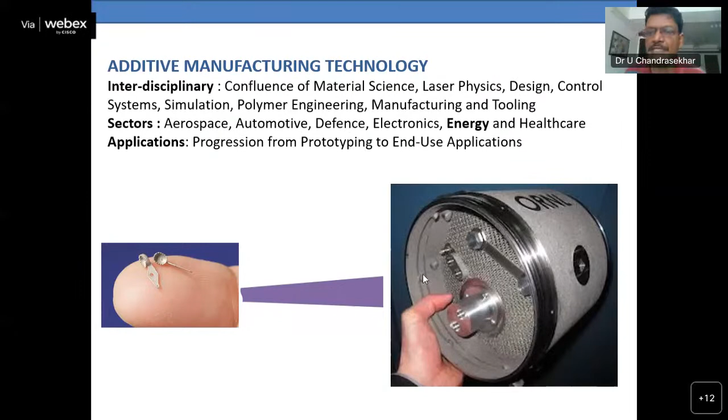And in recent times, we have seen SpaceX from the US and Agnikul from IIT Madras that have proclaimed the possibility of producing a monolithic rocket engine running into almost 1 meter length for space applications through additive manufacturing. So the sectors that have been able to derive advantages from this technology are multifarious: aerospace, automotive, defense, healthcare, electronics, etc. But for today's discussion, I limit the applications to those of the energy sector.

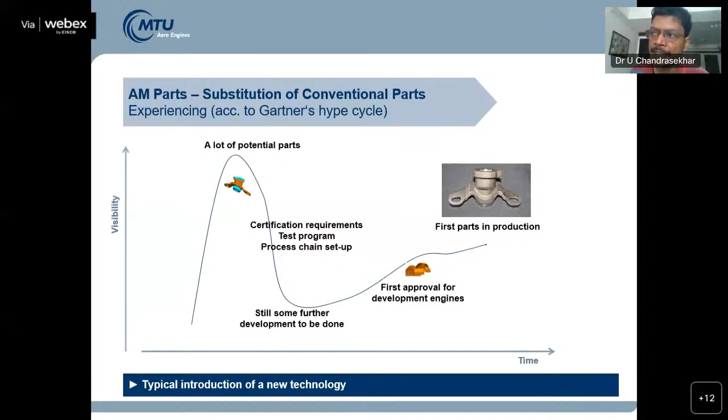Here I am citing the example of MTU engines from Germany, where you can see that making the part is only one part of the challenge, but getting the necessary certification to ensure its endurance, strength and integrity under operational conditions is an activity which consumes substantial time.

Whenever we talk about additive manufacturing, our vision might be connected with the large engineering companies, but pleasantly, hundreds of startup companies have also come to the forefront in integrating this technology into product development. Even in our own country, there are more than 10 startups using this technology with a lot of success for the energy sector.

Just to quote one global example: Graphene 3D Lab, located in the US, has been able to produce FDM filaments with a thermoplastic matrix with graphene added in certain compositions, and these filaments of graphene and thermoplastic are used for making the disc batteries in lithium polymer battery situations.

In our own country, there is a company called AMS India, located in Bangalore, which has developed a system that can handle ceramic materials, metallic materials and composites, with multiple heads mounted on a robotic arm to produce parts with variable levels of hardness as well as the necessary chemical resistance and mechanical integrity for applications in wide-ranging contexts, from missiles at one end of the spectrum to high temperature gas turbine engine modules at the other end.

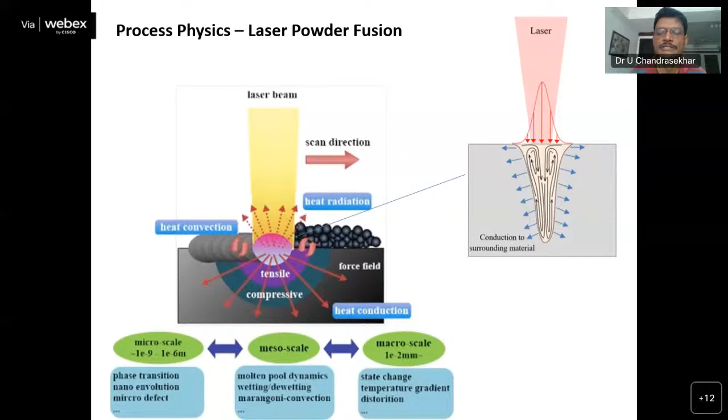To make parts with the necessary strength and put them into service, there are a lot of optimization procedures put into play. One of the primary examples is considering the volumetric energy density, wherein you derive the density as a function of laser speed, laser power, hatch spacing, and layer thickness. Try to find the process window where you are likely to encounter keyholing, or, if you put in less energy, where most of the particles remain unfused.

So you need to find the optimal mix of these parameters leading to a volumetric energy that is just sufficient to melt the part and create a track with the necessary geometrical integrity. Fundamentally, whenever you look at using additive manufacturing in harsh environment applications, we are talking about a dedicated effort that connects the process parameters to the microstructure to the property.

Just as an example, I have shown here how SS316, when melted in powder form using lasers, provides an ultimate strength of almost 1032 megapascal, which compares very well vis-a-vis the wrought alloy.

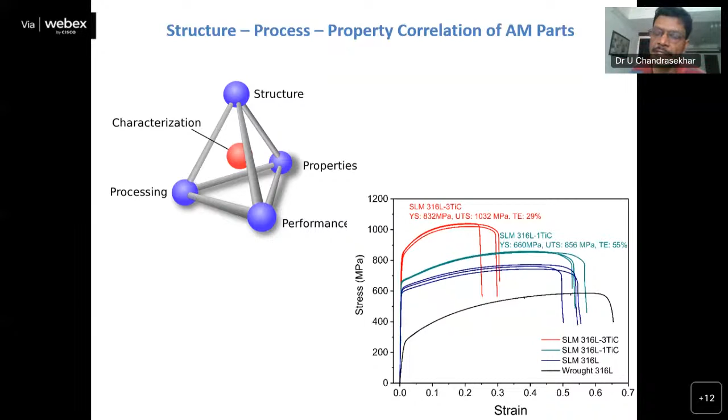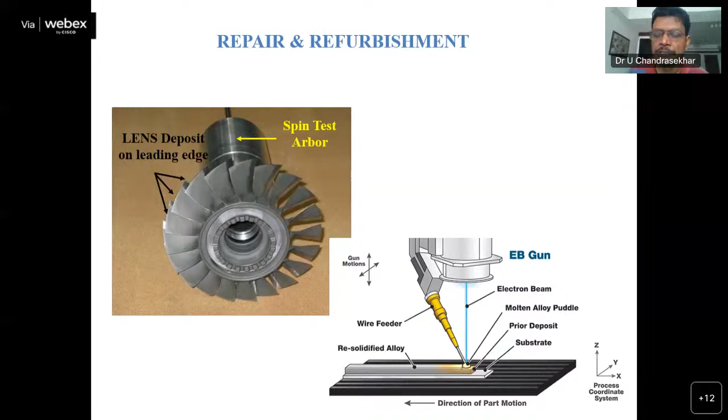The other technology which is equally important in case of additive manufacturing for energy sector is called directed energy deposition. In this case, you have got an energy source, could be a laser beam, could be an electron beam, could be electric arc or plasma, and the material is fused as it is being deposited on a surface. And the primary application associated with this particular technology in the energy sector is about depositing the material at the point of requirement and bringing the components back to the original shape, and repairing and refurbishing and life extension of the parts is the most important application of the directed energy deposition in energy sector.

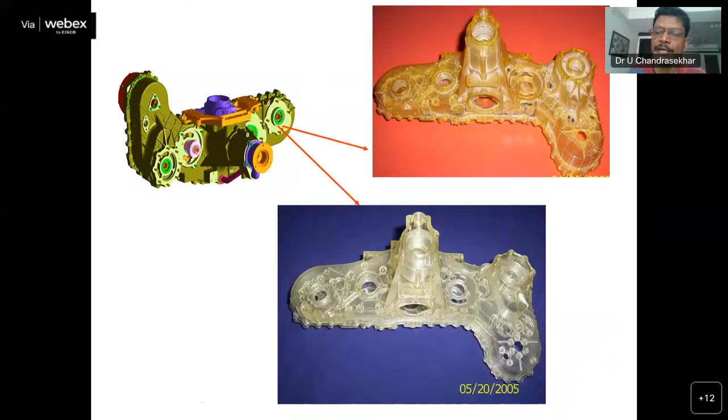At the other end, we have got technologies like stereolithography, which can handle photopolymer materials. Once again, in this case, you move a laser beam on the surface of the photopolymer, and the liquid phase converts into solid phase on the infusion of the energy from the laser beam, and you can make these translucent parts directly from the CAD parts. So they are extremely good vehicles for design visualization.

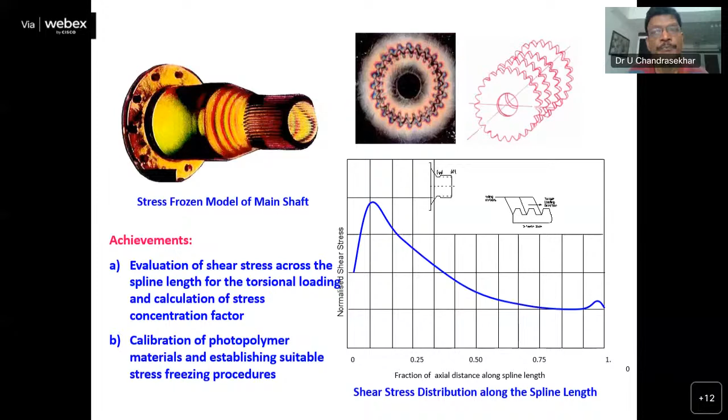And when you are interested in taking up the stress analysis of these parts, you can make 1:1 replicas of these parts, put them under simulated loading conditions, and study them through reflection polariscopes or conventional transmission polariscopes to get first-hand information on the distribution of the stresses as well as the stress concentration factor, through which you can understand the fatigue failure of the component when the design is not optimally done.

Whenever there is an instance where additive manufacturing is not able to provide the solution in the metal of your choice, you can make the patterns, quasi-hollow patterns, using additive manufacturing, and then go through secondary techniques like investment casting to convert plastic parts into metallic materials. So this is called rapid tooling, and this is something which is generally used in the industry when the material of requirement is not directly provided by additive manufacturing.

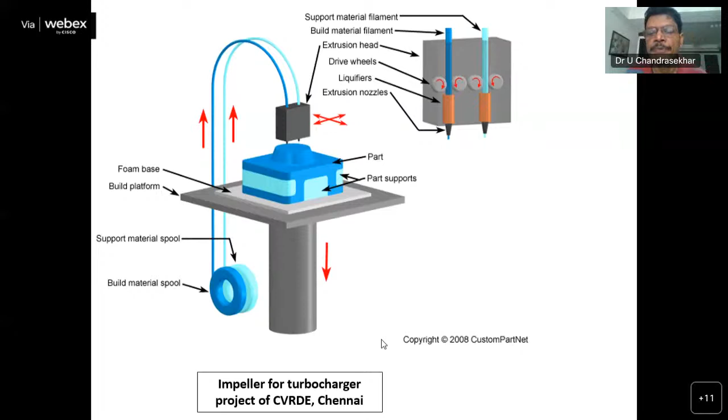The most ubiquitous technology of additive manufacturing is called fused deposition modeling. It's also called fused filament fabrication, wherein you are sending the filament, which is typically 1.75 mm in diameter, through an extrusion head. The extrusion head is maintained at a temperature which is slightly above the melting temperature. The build platform has got the mobility in the Z direction. The extrusion head can move in the XY direction, and the entire part, like what I have shown in the bottom, can be made in just a few hours by making use of fused deposition modeling.

How is it relevant to the energy sector? In recent times, it has been observed that the extrusion heads are mounted to robotic arms, and through controlled movement of these robotic arms, we are able to make parts from thermoplastic materials, including continuous carbon fibers. And then we can also have layers of epoxy resin or acrylate resin smeared over the surface. And we are able to produce large sized industry relevant parts, including storage cylinders, using these robotic assisted fused deposition modeling technologies.

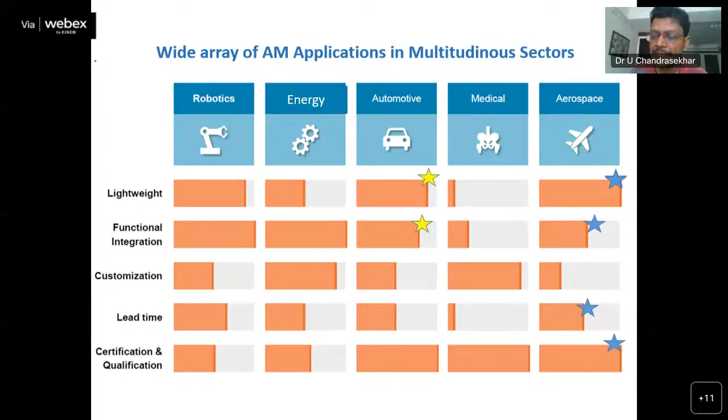So if you want to capture the very important characteristics due to which additive manufacturing has become relevant to energy sector, it's because we are able to integrate multiple functionalities into the system through re-engineering of the part. You can do customization of the geometries without any loss of time. And in the bargain, you might be able to even cut down the weight. And last but not the least, certification and qualification bodies have got enough maturity now to indicate whether or not the part which has come through additive manufacturing is capable of replacing the part which is conventionally manufactured.

So I would like to conclude this brief talk by delineating some of the possibilities in the near term. Especially if you are talking about the nuclear energy sector, there is so much emphasis on design of new alloys for additive manufacturing with good irradiation tolerance and corrosion resistance. And importantly, there is also a traction between high entropy alloys and additive manufacturing, which will go a long way in terms of making the cores for the nuclear sector, for the current generation of reactors, as well as the futuristic advanced reactors.

And if you are talking about microbial fuel cells, there are a lot of applications connected with biomimicking lattice structures, and also the application of macro size porous structures with high specific area for collecting the microbes.

The laser powder bed fusion of the titanium alloys and duplex steel has led to reconfiguring of the supply chain. I would like to conclude my talk by saying that the ASTM F42 committee has set up a subcommittee in recent times for looking at the ways and means of testing and certifying these materials for practical applications in the energy sector. Thank you very much for your kind attention. With this, I conclude my presentation.

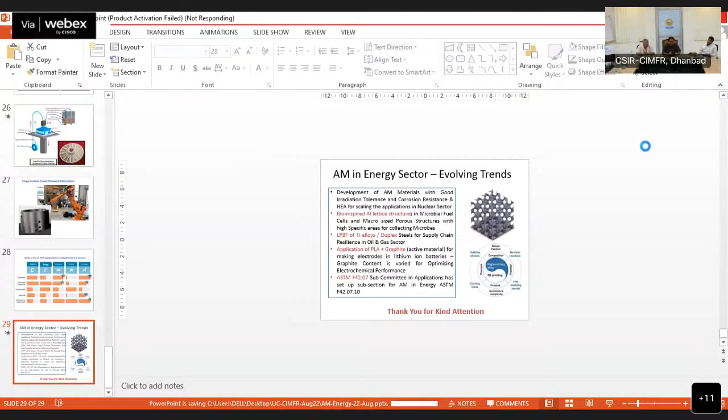To address the question of Pankaj Kumar Arya, I would say that chemical looping combustion has not progressed much in India. Some work has been done at CSIR, CMERI Durgapur, and NEERI. But with Indian coal, it can be done. It is a very futuristic technology, and it can be done through the gasification route only, because Indian coal is very high-ash coal. So for the gasification route, it can be done, but it's at a very early stage, too early to comment on this technology being implemented in India. It is in a very primitive stage. I think I have given a little bit of projection on this technology.